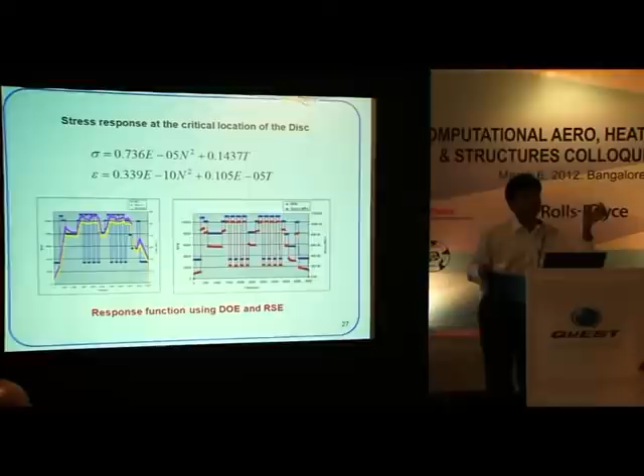Either you can go for a stress versus life approach or strain versus life approach, and keep on calculating the life consumption as a function of operational parameters, not as a function of time for which the gas turbine is tested, which in turn is tantamount to life extension.

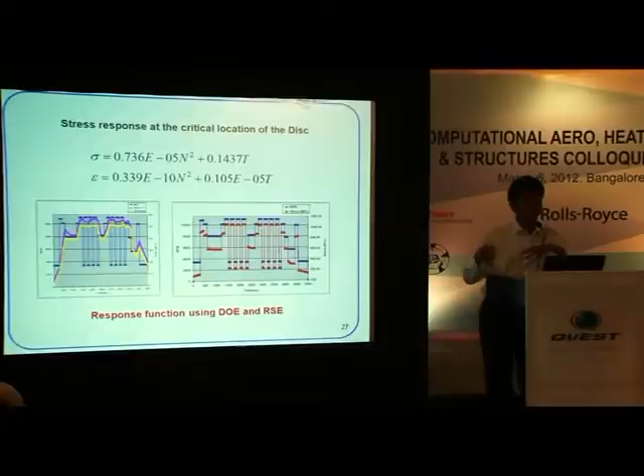Because if you are able to assess the life consumption, you will definitely know with 100% conviction at what point of time you can say curtains down for a particular component.

Now, I've been talking about CAE practices in isolation, but when you come to companies whose livelihood is the design and development of gas turbine engines, you don't see the CAE community working in isolation. The CAE community in most of these engine houses works in tandem with the experimental mechanics team, or SEM teams, in terms of identifying problems and providing solutions.

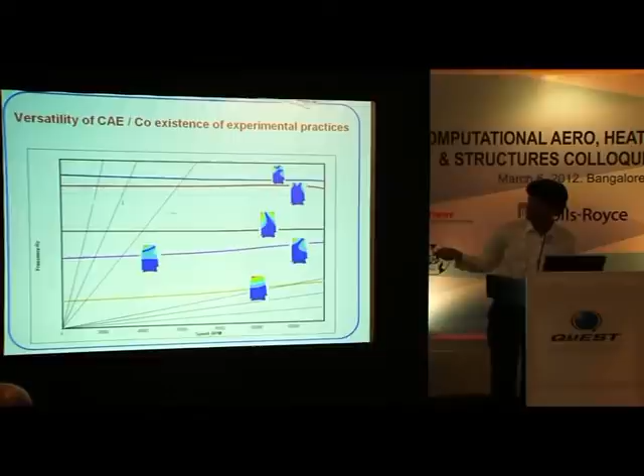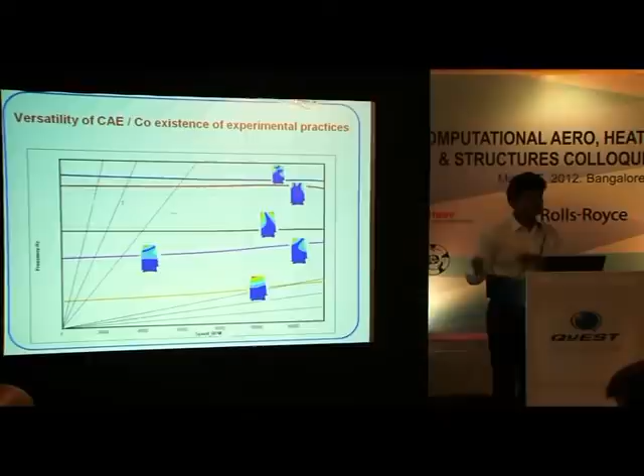One thing which comes to the forefront whenever you talk about CAE is the versatility of CAE techniques. Whatever is required for understanding the mode shapes of turbine blades at different frequencies and speeds, in terms of thousands of strain gauge based testing, can be done by one single analyst without spending too much money on resources like strain gauges, lead wires, or instrumentation.

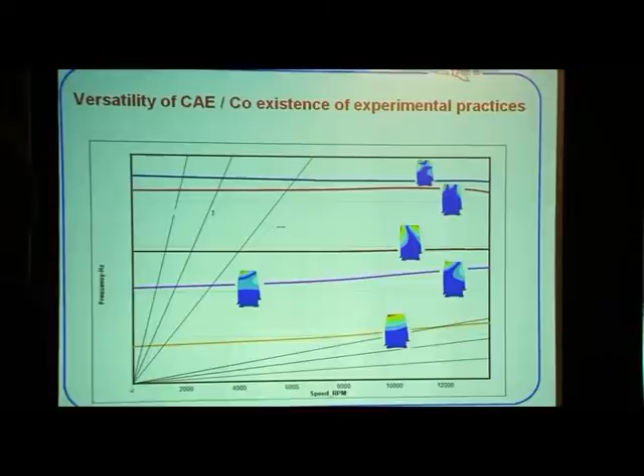But unfortunately, incidentally, practices which are hinged only on CAE may go astray in many cases simply because of the uncertainty connected to the boundary conditions or operational conditions. So the coexistence of experimental practices is the need of the hour, especially when you have a provision for getting the full field data.

You can see one nice technique called thermal painting, wherein on one side you do the heat transfer analysis to create full field temperature maps of the combustor liners, and on the other side you can put these temperature sensitive paints on the combustor liner, and this goes through the complete series of testing.

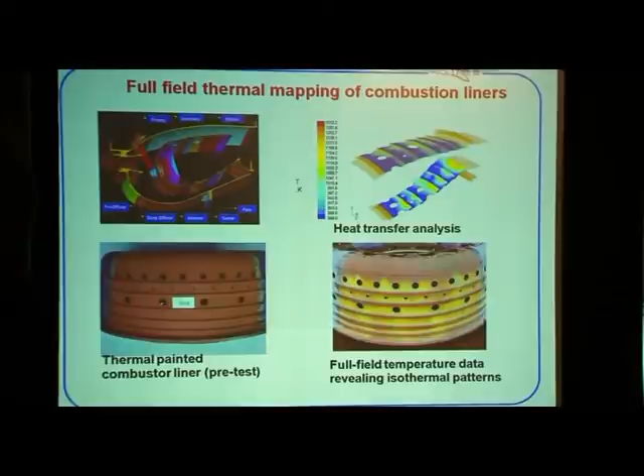When you strip it open, it might have developed beautiful color patterns which are nothing but isothermal patterns, and by looking at the patterns straight away you can pinpoint specific hotspots which can be correlated with the results of the heat transfer analysis. So it's a beautiful approach which can synergize an experimental practice with an FEM practice, especially when you talk about internally cooled components like turbine blades or nozzle guide vanes.

You tend to give a lot of importance to identifying the distribution of these temperatures across the cross section of the blade, and most importantly, you are interested in locating the specific point wherein the temperature is likely to peak.

So this particular information, on one side, could be obtained from hundreds of thermocouples which may be intrusive in nature, or you can employ thermal paints and correlate the results with the heat transfer analysis.

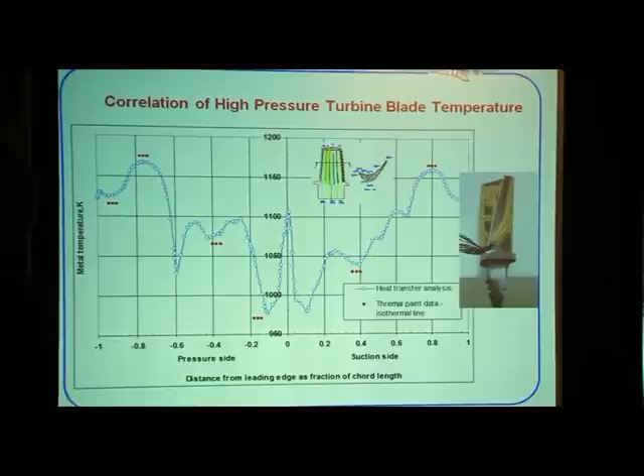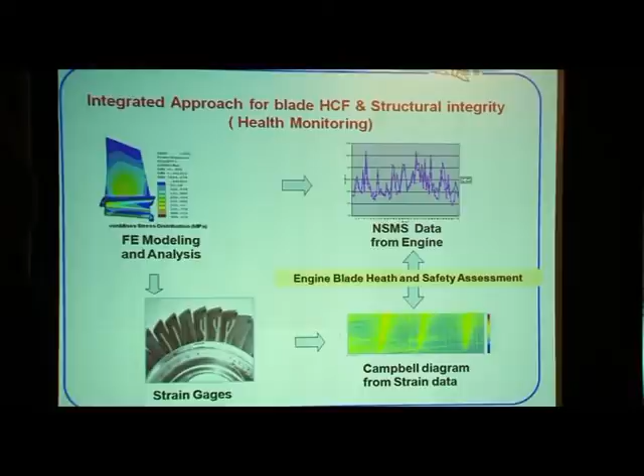And this is my favorite topic. In recent times, digital manufacturing has come into the anvil in terms of translating your CAD data, without the usage of any fixtures or jigs, into a physical tangible part. So if you can conceptualize a geometry, however complex it may be, in one singular step you can translate your design vision into a physical part. That is called rapid prototyping.

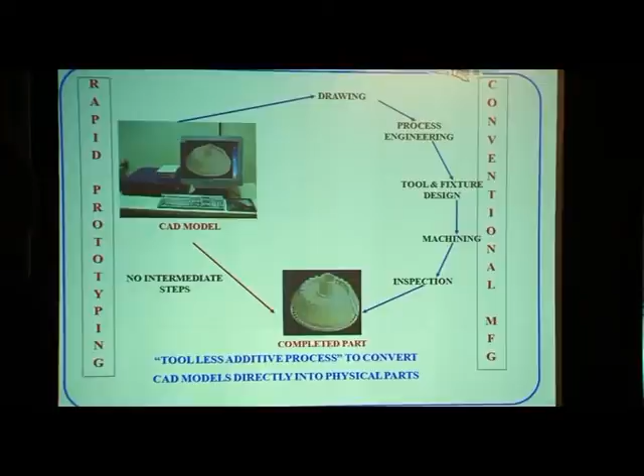How does it enable product development, especially in a gas turbine engine? Imagine you have an LP spline shaft, that is a low pressure shaft, with a male shaft and female shaft. The splines are extremely vital for transferring the humongous loads from the turbine to the compressor. The splines often encounter failures of the fillet roots, and the torsional shear stresses across the spline length are extremely important.

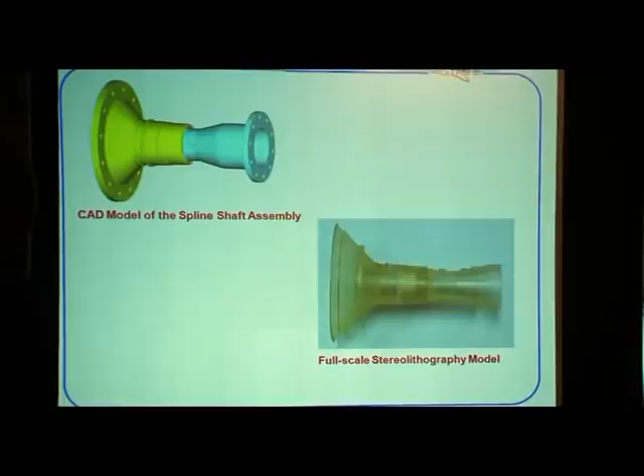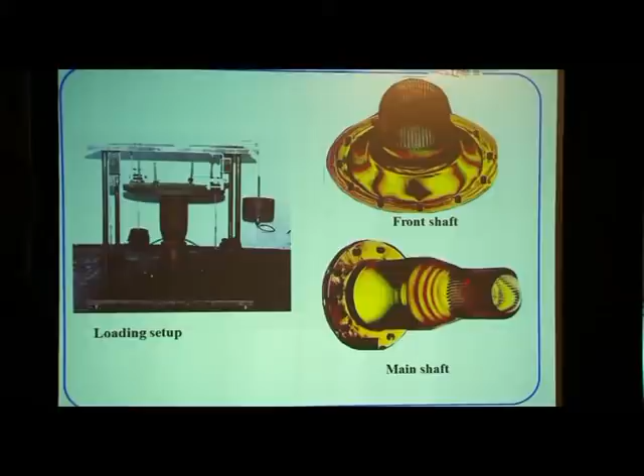It's a complex three-dimensional stress analysis problem. So in one single step, you can create the front shaft and main shaft and assemble them. You subject it to torsional loading, and by doing the stress freezing technique on this shaft, you can easily identify the specific location where stress concentration is likely to be encountered. This data can be co-validated with the 3D analysis of the shafts.

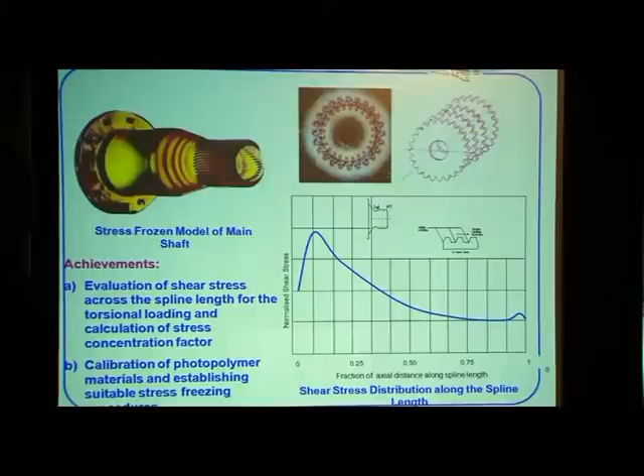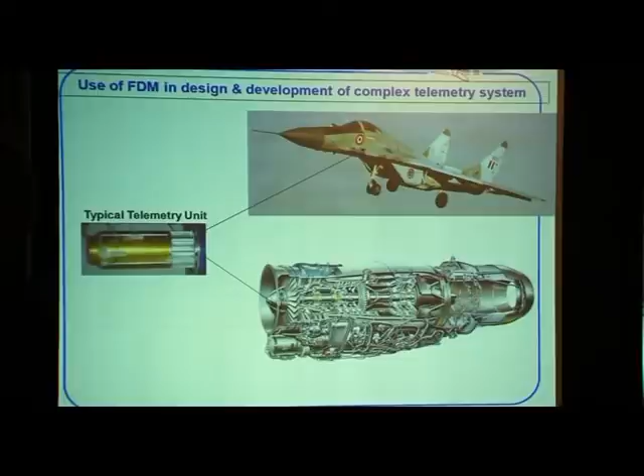This is one more beautiful case study where we wanted to develop an instrumentation unit called a portable telemetry unit. Most of you are familiar with telemetry and telecommanding, essential for identifying the health of a system—be it an aircraft or a gas turbine engine. It picks up signals from various transducers like thermocouples, pressure gauges and strain gauges, and keeps transmitting the data to the ground station.

Fundamentally, the packaging of this unit is extremely important. It has to be limited to very small dimensions, and the electronics need to be contained below 70 degrees centigrade. There is a tremendous opportunity for applying CAE practices in packaging it, minimizing weight, and ensuring the temperatures do not exceed 70 degrees—the threshold beyond which electronics are no longer reliable.

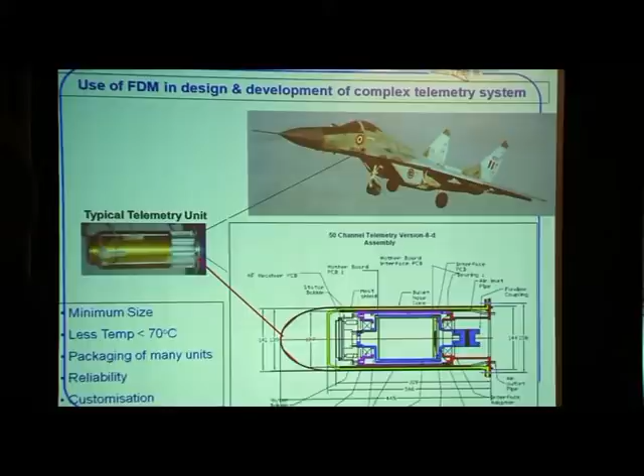So how were CAD, CAE and digital manufacturing used in concurrence? We created a complete CAD model of this telemetry system, then transferred all the CAD models into physical prototypes using a technique called fused deposition modeling out of thermoplastic material. We then conducted analysis where, on one side, we were able to predict the hot spot exceeding 70 degrees on the inner rotor using heat transfer analysis.

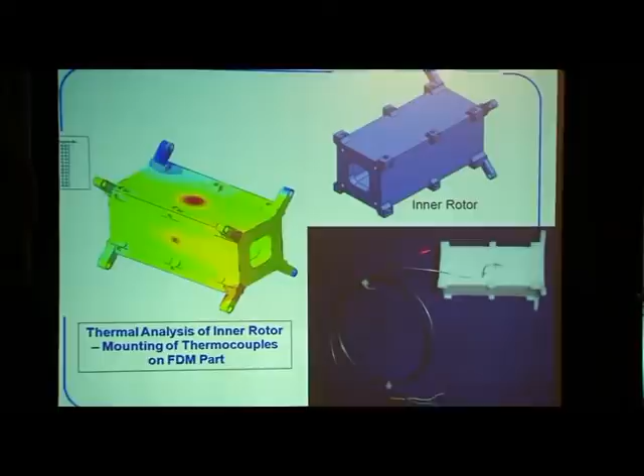On the other side, since the parts were made within a couple of days, we were able to mount a thermocouple and verify whether the hot spot predicted by the FEM was really a hot spot. There are also cooling pipes responsible for cooling the shell, and we created small cooling pipes using rapid prototyping, enabling us to conduct heat transfer tests by embedding them into the external periphery.

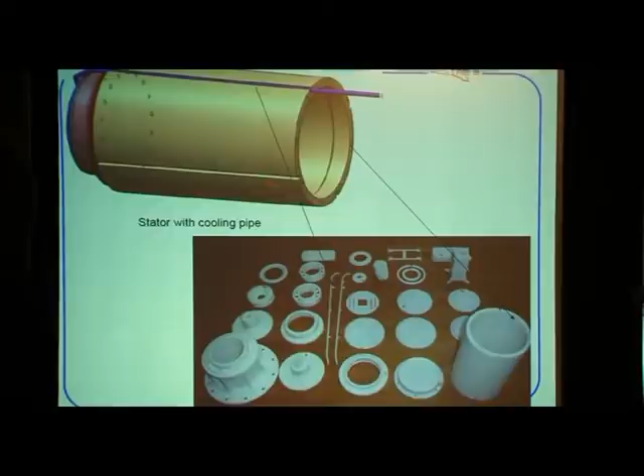Ultimately, the strain wheel or strain simulator, which is the core element of this telemetry unit, you can see how the stress distribution was assessed by FEM. Concurrently, we also mounted a number of strain gauges, and this data correlated so beautifully that we had no problem translating this design into a metallic part made out of titanium alloy.

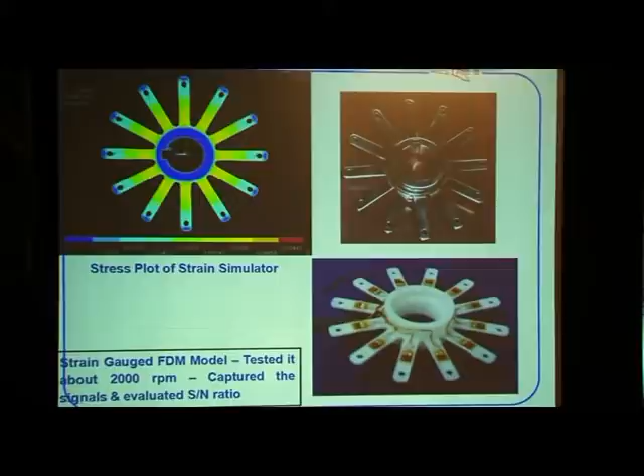This is one more case study. Traditionally, when talking about gas turbine engines, don't get the impression that you should only talk about the components—you can also help with test rigs essential for analyzing the integrity of the components. In this case, the test rig was meant for evaluating the integrity of a long slender shaft called the instrumentation transfer tube. It's about 1.6 meters in length with wall thickness less than 3 mm.

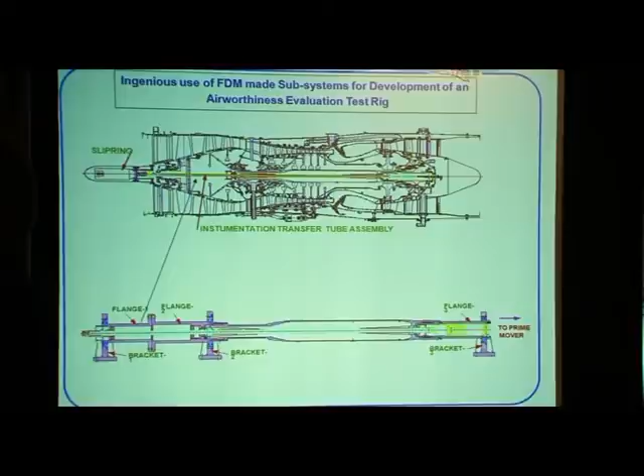So what we did was create a CAD replica of the entire test rig, but we had our own uncertainties about whether this test rig would function at about 12,000 RPM with just 2 support points. Most importantly, this component is a Class A item—meaning if it fails, it will be catastrophic to the entire mission.

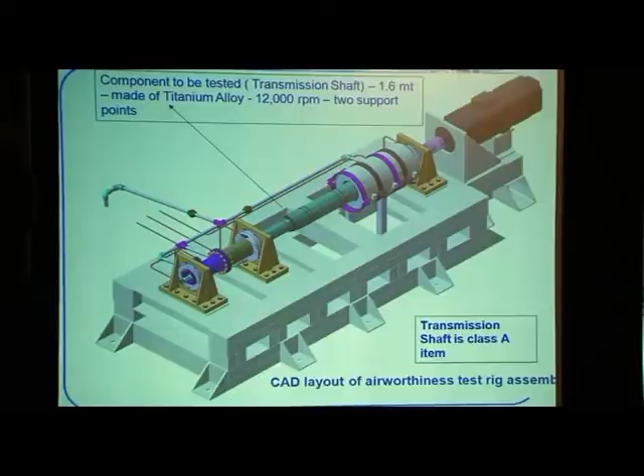So we created a scaled down replica of the same, and rehearsed the complete assembly and disassembly procedures, including the making of the tools. With this confidence from a virtual prototype, we were able to jump into the actual testing, completing about 600 hours of testing on the instrumentation transfer tube.

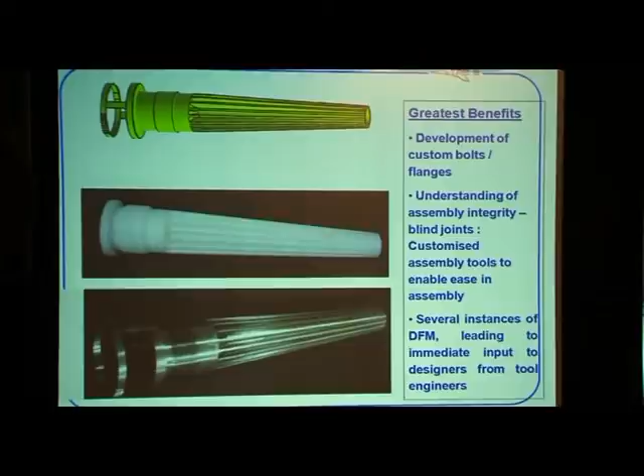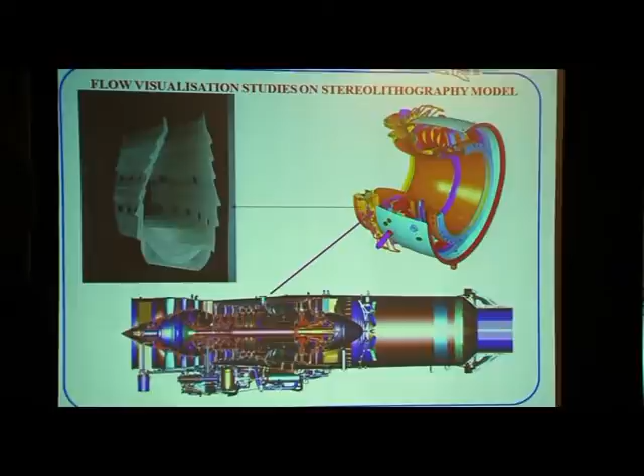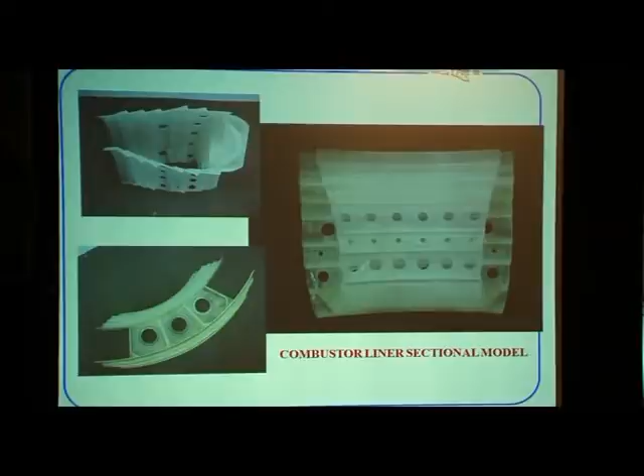One more case study shows the coexistence of CFD studies for identifying flows, and the CAD model used for creating the combustor was also used as input for creating a transparent stereolithography replica. It was tested in a water flow facility, and pressures were picked up from various locations in the combustor. This pressure drop data was provided as input to CFD practitioners for assessing velocity vectors.

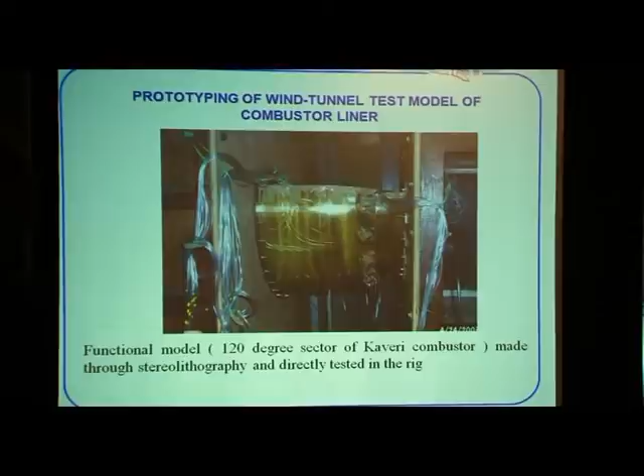Okay, I am almost in the concluding phase of the presentation. I think maybe there are about 4 or 5 slides left.

I had an occasion to go through a recent publication of NAFEMS, a white paper study called FENet, where more than 900 respondents from the aerospace sector were interviewed to identify the future drivers for CAE analysis. The first driver is shorter development time.

The second driver, extremely important in these times when the price of a petrol barrel is always on the upsurge, is reduction in fuel consumption. The third, equally important criterion, is safety requirement.

The fourth requirement, which may not be obvious to many beginners of CAE but is very important once you get into the real world of engineering, is interfacing between the analysis results and the testing requirements.

The fifth one is very fascinating: dynamic data driven analysis. What does it mean? Typically, the parameters of an FE model are constant once the simulation process is on—boundary conditions or anything corresponding to load distribution. Imagine a test going on and you keep getting input from the test in real time, providing it as input to the analysis.

Through the synergistic combination of inputting test parameters from the real world into the analysis, you can control the simulation in a very dynamic way.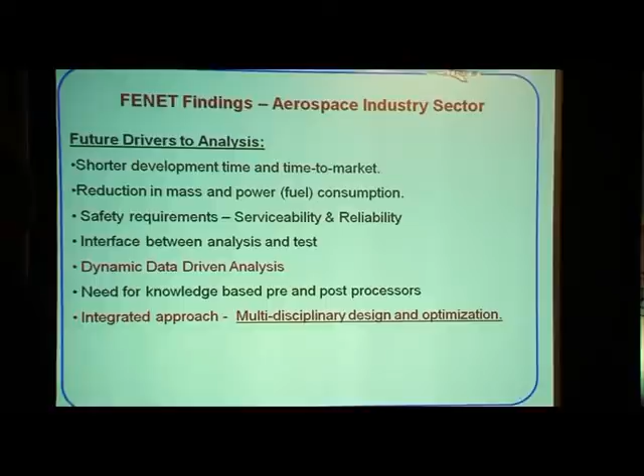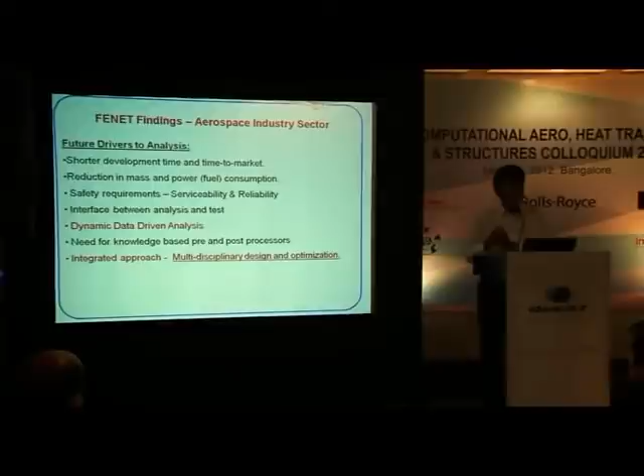The beauty of this is that it could be enabled on smartphones which you carry. They are looking at the possibilities of implementing dynamic data driven analysis for situations where certain parameters are not known simply because the data is not available, or maybe they are stochastic in nature.

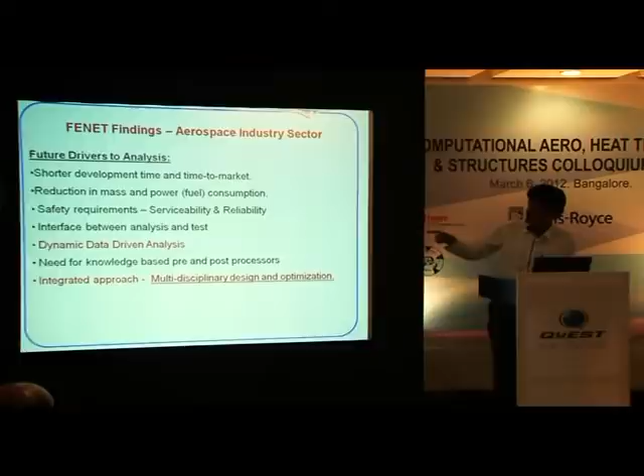The next point is the need for knowledge-based pre and post processing, and more importantly, we are moving more and more towards an integrated approach where we talk about multidisciplinary design and optimization.

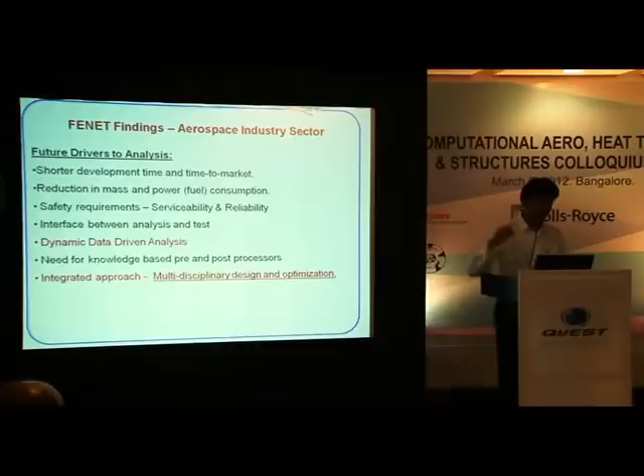Till now I've been only talking about FEM practices corresponding to gas turbine engines, and as Paul displayed, maybe it is at the UG level, PG level, or PhD level of CAE practitioners. But what is very heartening is that even today's student community has taken to CAE in a big way.

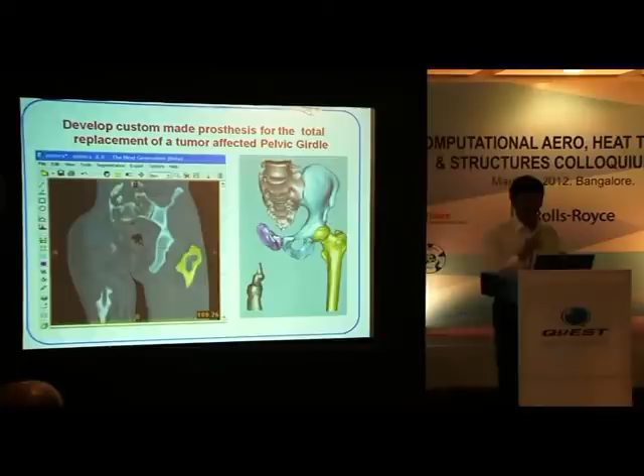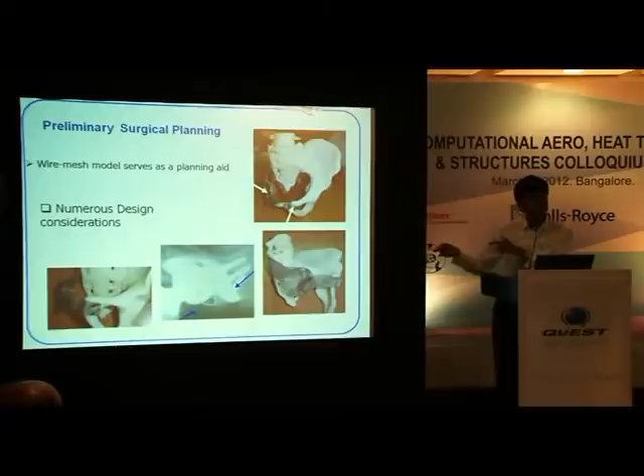This particular project was done by a biotechnology student of our own Bangalore-based institution who wanted to develop a customized implant for a patient who had lost a major portion of his pelvic girdle on the right side. The challenge is developing a customized implant, because in such cases you don't get standard implants. So he started working with an orthopedic surgeon on one side and a CAE practitioner on the other, and he came to us regarding testing of this pelvic girdle.

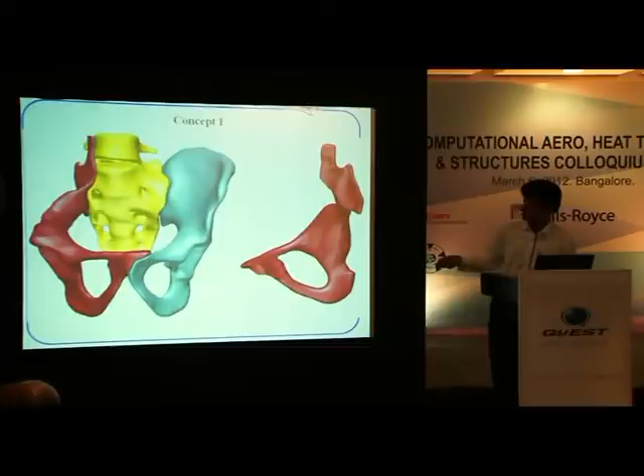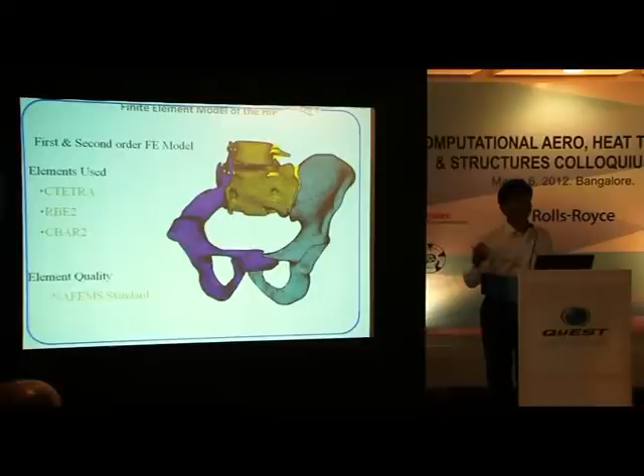You can see he started developing many models—first concept, second concept, third concept, and so on. When you do this finite element analysis, the biggest obstacle is how to get reliable models for the bone structures. The uncertainties include soft tissue growth, whether you're capable of accounting for it, and whether you're considering the cyclic loads to which this anatomical structure is likely to be subjected.

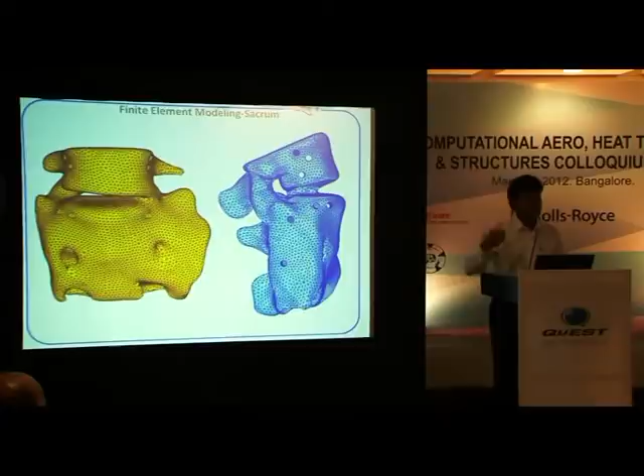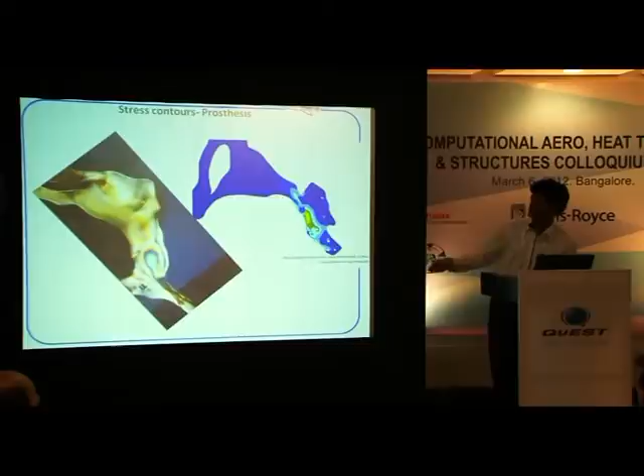With all these considerations, he developed an implant design which was tested, and he identified the stress concentration factor very close to the fastener holes. He was immensely surprised when he gave us a model of the same thing, which we translated into a stereolithography model, and the worst case scenario was very close to what he predicted. Now he is marching towards medical trials of this implant.

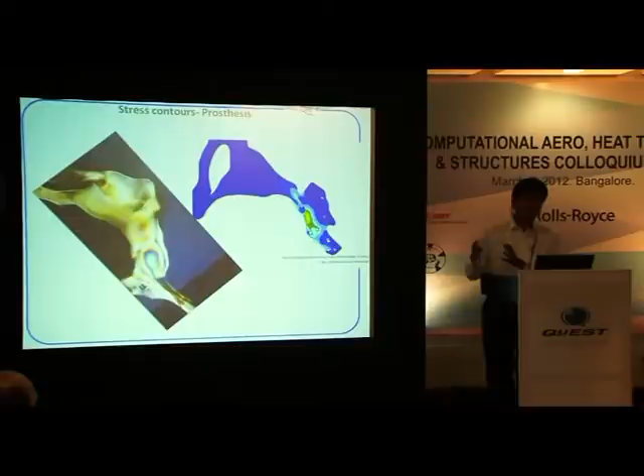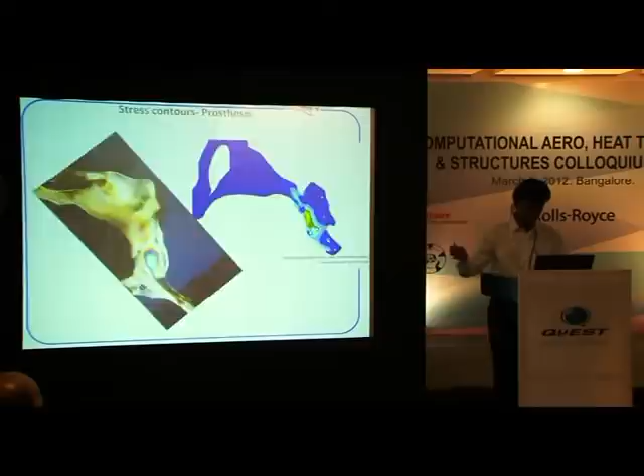So you can see this kind of multidisciplinary approach is apparent not only in gas turbine engines but is also translating into bioengineering and the consumer goods sector, as illustrated before. Let us end this talk on a very positive note.

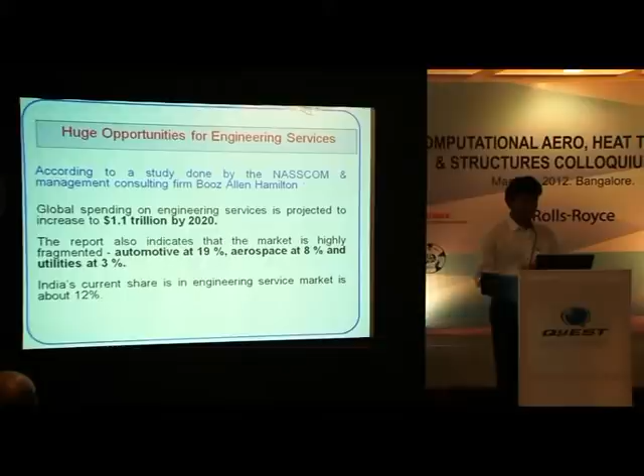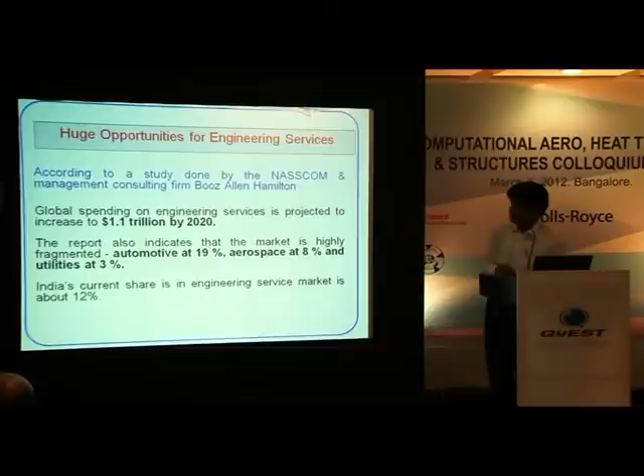NASSCOM is a revered professional body of India, and they got the consulting firm Booz Allen Hamilton to do a survey on the possibility of business opportunities for engineering services, which they predicted will be worth about 1.1 trillion by 2020. This particular market is highly fragmented, with major players like automotive and aerospace garnering about 25% of the market.

Pitiably, in spite of the fact that we have a very good mathematical background, analysis background, and about 14 lakh engineers passing out of 3,500 engineering colleges, our current share in the engineering services is just about 12%. So where is the need?

We need to overcome this inhibition that we should be doing only secondary engineering services. We need to get into design services, and if we can bring quality into analysis practices, it has been predicted that from the current 12% level, we can hope to grow to about 30%, which in turn can lead to 2 lakh plus job opportunities in the CAE world.

This particular market could be as high as $25 billion, from not only indigenous engineering services, but also from offshoring the engineering services.

So I just want to conclude my talk by saying that analysis professionals, of which we are all representatives, can play a vital role in ensuring an inclusive and sustainable growth of the business at the ground level, and technological growth of the country at large for achieving higher and higher echelons in the years to come. Thank you so much.